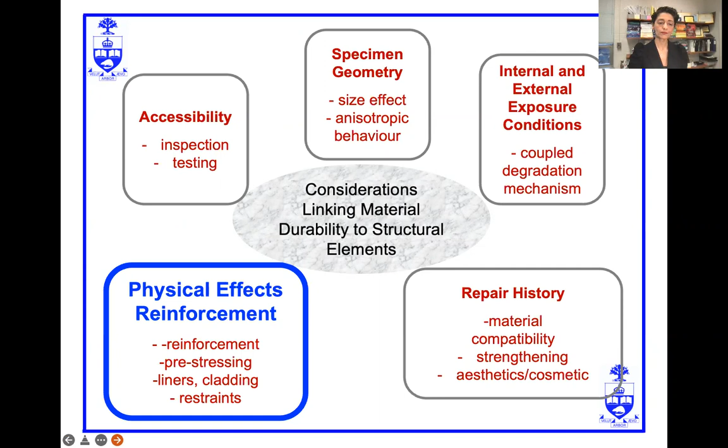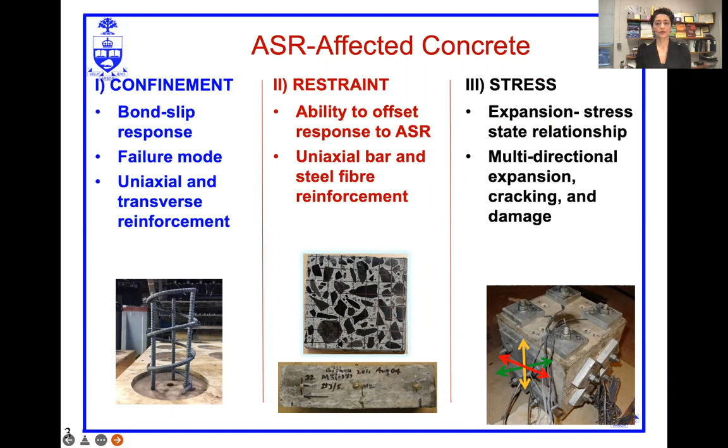I will specifically be speaking about the effects of reinforcement on ASR-affected structures, particularly the effect of reinforcement on the ability to confine, restrain, and stress the response of concrete to ASR. This work has formed the basis of student dissertations and manuscripts, and throughout the presentation, when I present the references on the upcoming slides, it is the students' names who are presented in bold.

Some initial experimental parameters that are set, which apply for the various studies that I will be presenting in today's talk, is that the reactive aggregate is a coarse aggregate Spratt, which is a siliceous limestone. All of the specimens were cured in an accelerated ASR chamber at a 50 degrees Celsius temperature and a greater than 98% relative humidity.

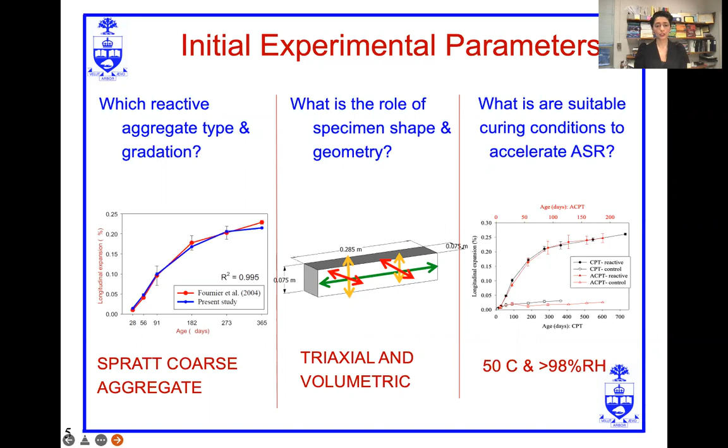We were also cognizant of the sensitivity of the specimen shape and geometry to the anisotropic behavior of the measurements. So wherever and whenever possible, we tried to take triaxial measurements, including assessing the volumetric expansion.

This slide shows a typical concrete mix design that we used in our study: high alkali GU cement, again, reactive coarse aggregate, non-reactive sand, and the concrete was boosted with alkali pellets.

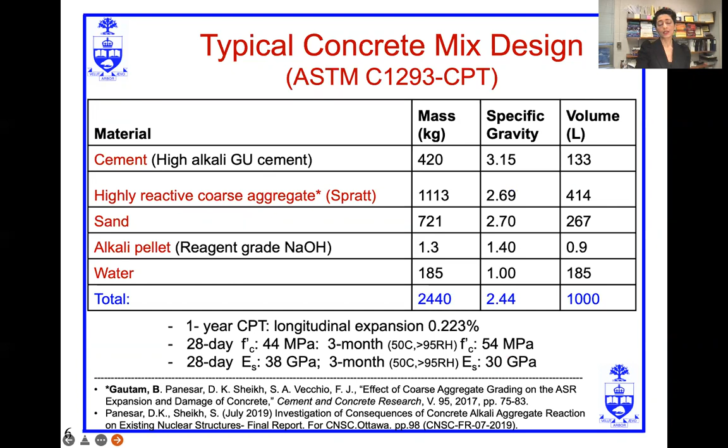To evaluate the confinement aspect, we conducted the pull-out test on about 72 different specimens using an MTS universal testing machine operated in displacement control mode.

The bar displacement relative to the surface layer of concrete was measured using 3 LVDTs, as you can see here in the schematic, and the slip was measured up to 12 to 14 millimeters, at which point the instrumentation was removed and the bar was completely pulled out.

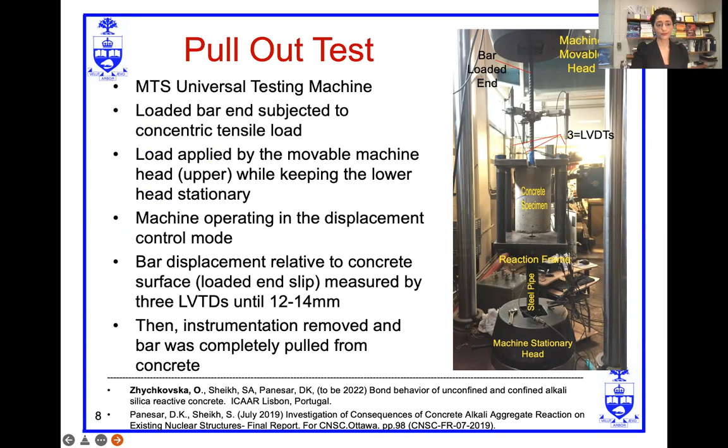Other than the concrete variable of reactive and non-reactive aggregate, we did pull-out tests at 3 different ages: 23 days, 4.5 months, and 7 months, to try to see the relationship between the progression of ASR and the pull-out test results.

We also had 4 reinforcement configurations: no reinforcement, transverse only, so a number 3 spiral with 100 millimeter pitch, longitudinal reinforcement only with 3 10M bars located 120 degrees from each other, and the LNTR case, which is simply the superimposed effect of the longitudinal reinforcement plus the transverse reinforcement.

The bonded length for all of the specimens was 100 millimeters, and the pull-out bar itself was a 20M steel bar.

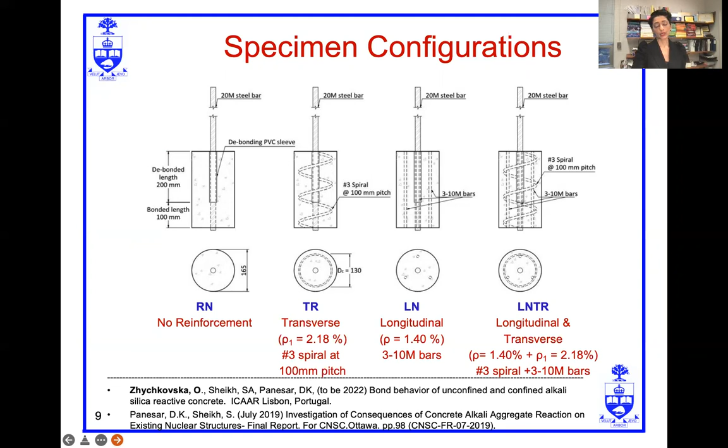This figure shows the bond slip response at 7 months for the 4 various reinforcement scenarios. So just to highlight a couple of the main points, first let's look at the plain concrete, the non-reinforced concrete. The black lines are regular concrete, the red lines are ASR concrete. What we can see here is that there is a reduced bond strength of ASR concrete in comparison with the control concrete, and that's reflected by those 2 blue arrows.

In contrast, if we compare that to the most heavily reinforced samples that we examine, the TRLN case, we see that the ASR response of the stress slip relationship is quite different. The bond stress actually plateaus for a longer distance, up to a slip of about 4 millimeters, due to the triaxially reinforced specimen and the added confinement response.

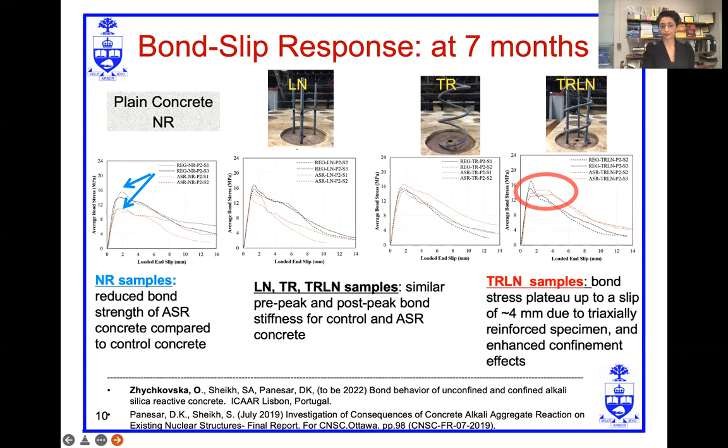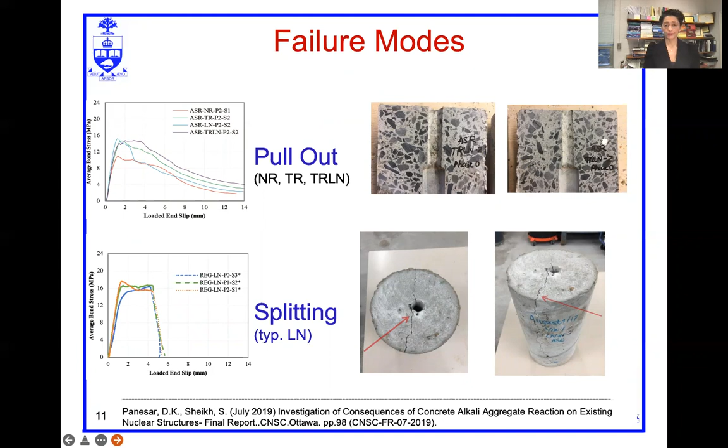In terms of the failure modes that were observed, most of the specimens observed a fairly classical pull-out failure. The only ones that didn't were the longitudinally reinforced specimens. Here we can see in the stress slip curves there is a sudden loss of load carrying capacity at about 5 millimeters load end slip. This corresponds to the visual observation of cracks extending from the steel concrete interface to the outer surface, and these cracks are visually apparent through the entire length of the specimen as well.

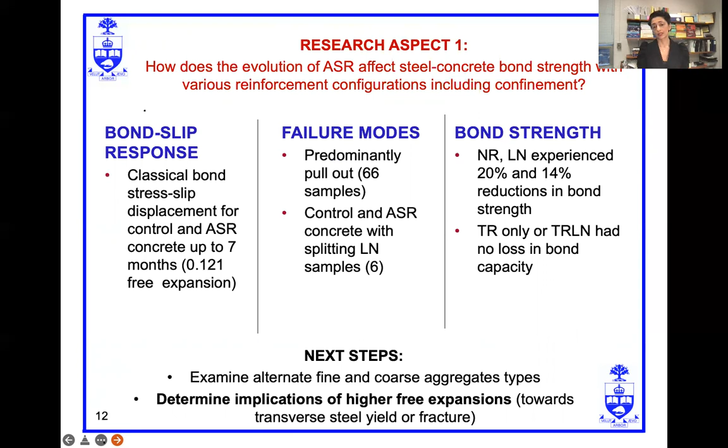Although it was observed that specimens with transverse reinforcement alone or in combination with longitudinal reinforcement had some benefits with respect to bond capacity, and that most of the specimens had a pull-out failure mode, we should note that these experiments were only done up to 7 months. More severe ASR expansions would have to be studied to get a better, more comprehensive understanding of the evolution of ASR on the steel bond strength.

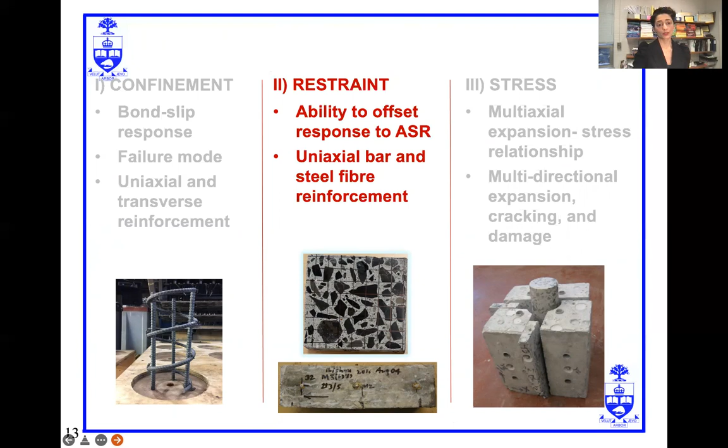Moving to the effect of reinforcement on the ability to offset response to ASR, we again looked at uniaxial reinforcement by use of steel fibers and longitudinal reinforcing bars. We had 5 different reinforcing scenarios in this case, using the Dramix RC80/30 steel fiber with 3 different volume fractions: 0%, 0.65%, and 1.3%.

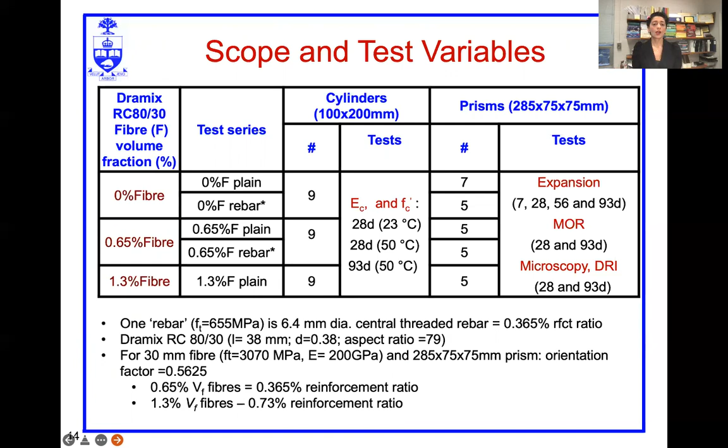Some of these fiber reinforced concrete mixes, the prisms, also had a central reinforcing bar, a 6.4 millimeter diameter bar, which corresponds to a 0.365% reinforcement ratio. So some of them had the bar and some didn't.

What we measured was 4 different expansion measurements: 2 longitudinal measurements of the core and the surface of the prism, and 2 transverse expansion measurements, one perpendicular to the direction of casting and the other parallel to the direction of casting. The transverse expansion is represented as the average of the perpendicular and parallel to casting measurements.

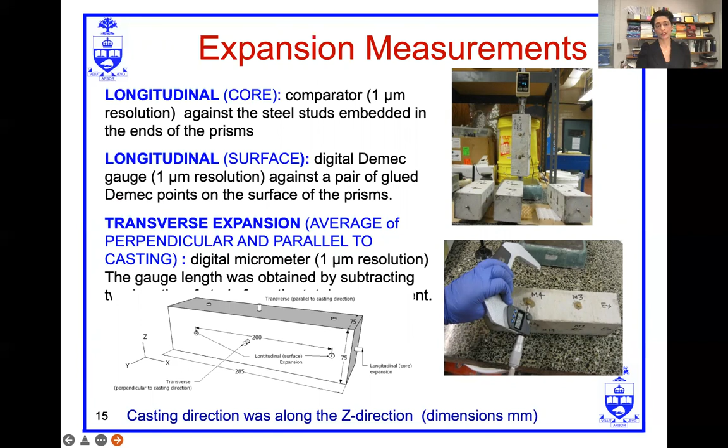What we see is the expansion is very sensitive to the presence of rebar as well as the positioning of the measurement. In the specimens without the reinforcing steel central bar, irrespective of the percentage of fibers, the core had a greater expansion than the surface, up to 25%.

In contrast, the specimens that did have this central longitudinal reinforcing bar, again irrespective of whether or not there were steel fibers, the core had a reduced expansion compared to the surface by up to 25% also. So interestingly, the expansion gradient from the core to the surface becomes reversed depending on whether rebar is present in the specimen or not.

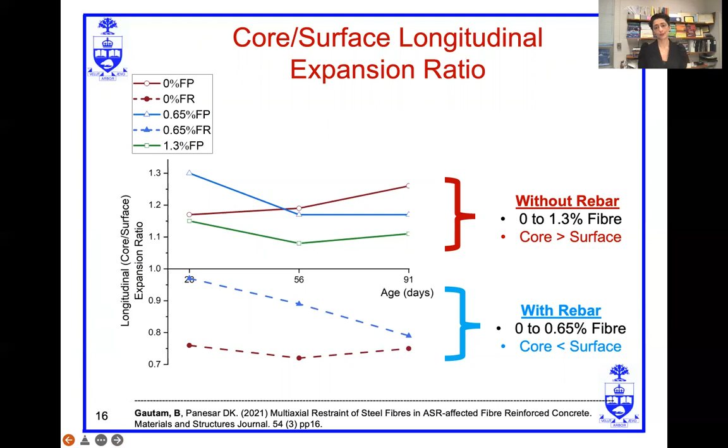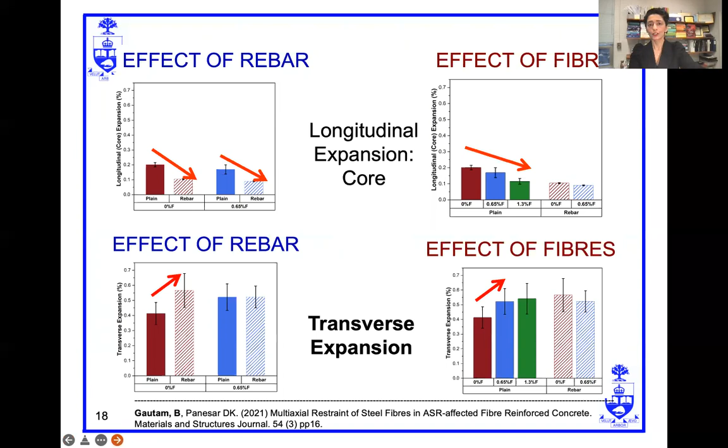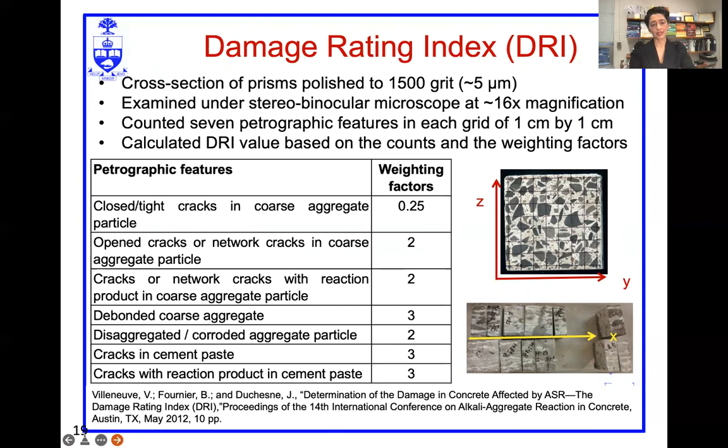So to take a closer look at that transverse plane, we conducted the damage rating index on the YZ surface where we evaluated 7 petrographic features. I'm not going to get into too much detail about the index itself, but I will highlight some of the features observed, which show the potential roles that the fibers were playing.

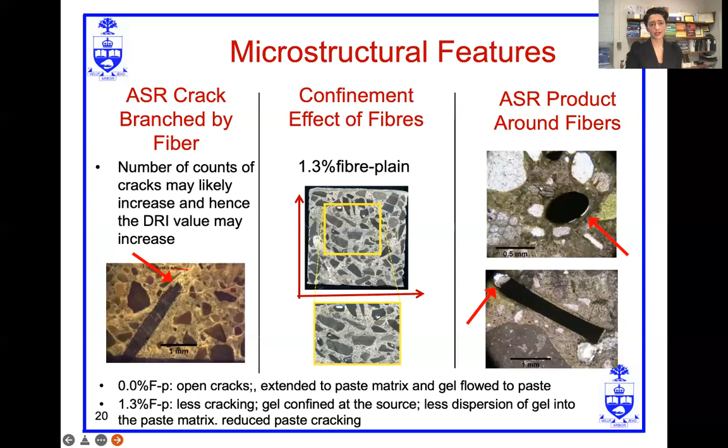We see that the crack is branched by a fiber. We also observed that fibers did provide some confining effect, so there was less paste cracking compared to the 0% fiber case, as well as less dispersion of gel into the paste matrix. We also observed the accumulation of ASR product around the fibers. Looking closer at that interfacial zone and the bond between the fibers and the matrix would also be a necessary next step to understand the mechanism.

So although we did find some benefits with the fibers, in terms of reducing paste cracking, partially or completely offsetting loss of mechanical properties such as elastic modulus and modulus of rupture, part of the complexity in understanding the real role of the fibers and the reinforcement was affected by the anisotropic behavior due to the geometry.

Specifically, fibers and the reinforcing steel seem to reduce the longitudinal expansion, but there was a transfer mechanism into the transverse direction, not necessarily reducing it.

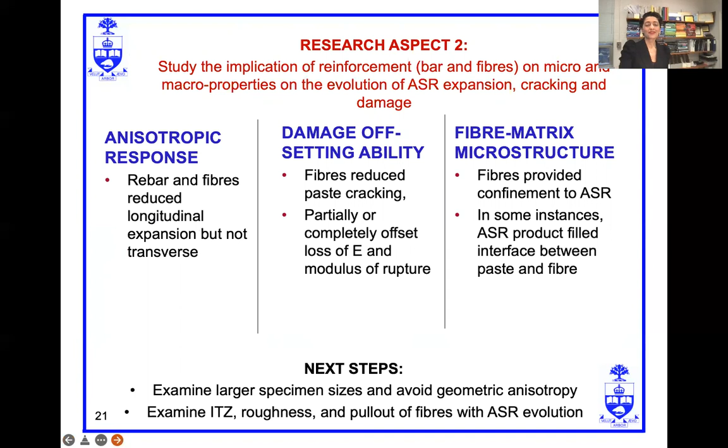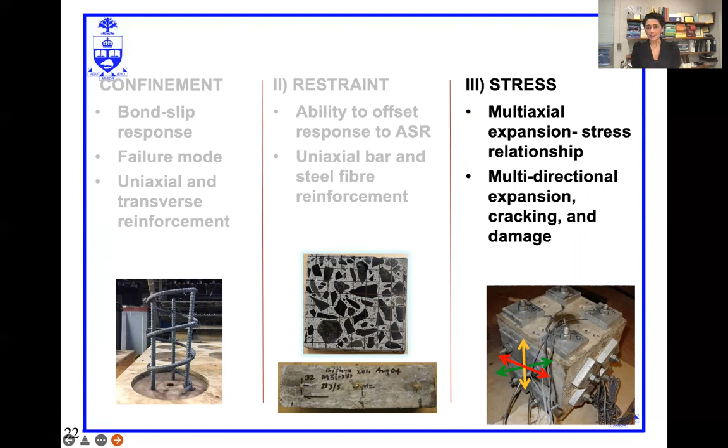So in our next study, to try to eliminate the effect of the geometry complications, we looked at cube specimens, specifically to look at expansion stress relationships.

We developed a method to apply and sustain multiaxial compressive stresses within the concrete, and this approach was conducted using a post-tensioning method of pre-stressing high-strength bolts.

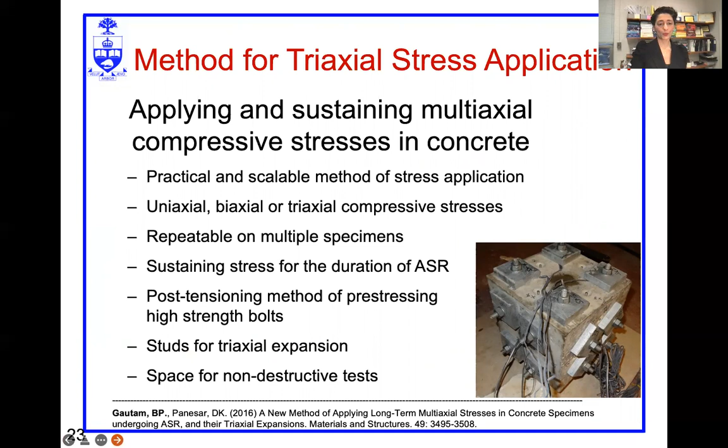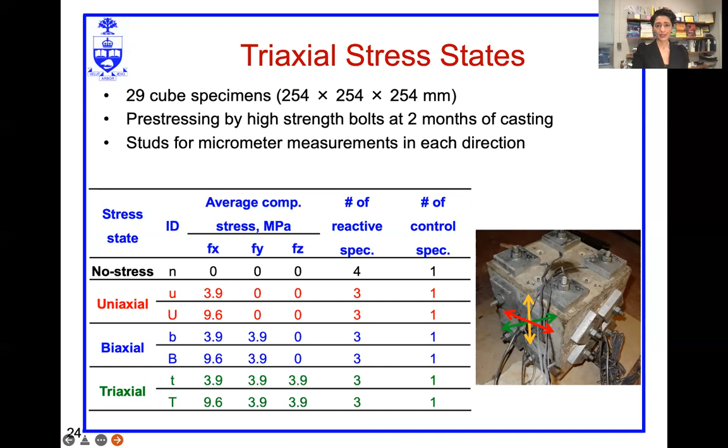We considered 7 different stress states, shown here on the slide: a non-stress case, 2 scenarios of uniaxial loading, 2 scenarios of biaxial, and 2 scenarios of triaxial loading. Our 29 cube specimens were 254 millimeters in dimension, and this figure shows some of the results.

The vertical axis is expansion. The horizontal axis shows the first set of data, the non-stress case, in the X, Y, and Z directions. Here we see, as we would expect, very similar expansion measurements.

For the 2 biaxial cases, low load and high load, we see that in the loaded directions, X and Y, there is some suppression of the measurement - that's the red and blue bars. But then we see in the free direction, the yellow bar, there is a transfer of that expansion.

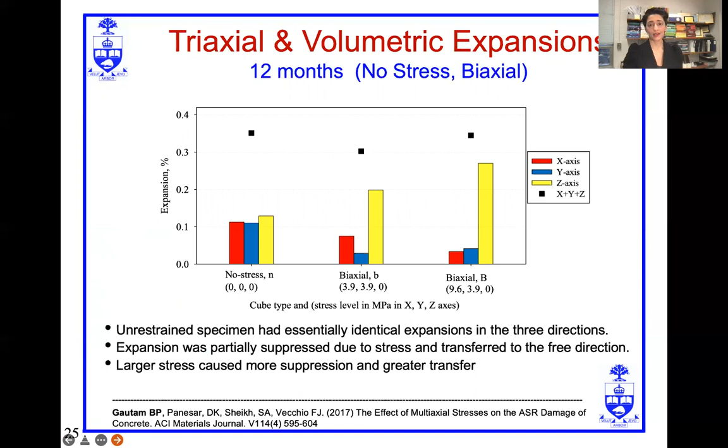Also shown here is the volumetric expansion, these 3 black dots. So irrespective of the large difference between the stressed axes and the unstressed axes, the volumetric expansion seems to conserve itself.

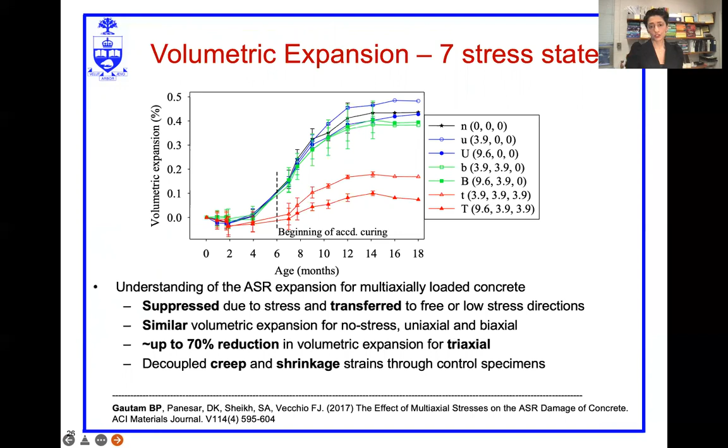Further to that, this shows the volumetric expansion for all of the stress states, and we can see that all, with the exception of the triaxial case, had a very narrow band of ultimate volumetric expansions. It was the triaxial loaded scenarios that had a marked reduction, up to about 70% reduction in volumetric expansion.

The ability for other approaches to be sensitive to this phenomenon of suppression and transfer - we did the damage rating index on 3 different planes for each of the stress states.

This analysis also captured and was sensitive to higher damage for free directions, lower damage for the stress axes, and in general, for the triaxial case, similar damage rating index for each of the 3 planes.

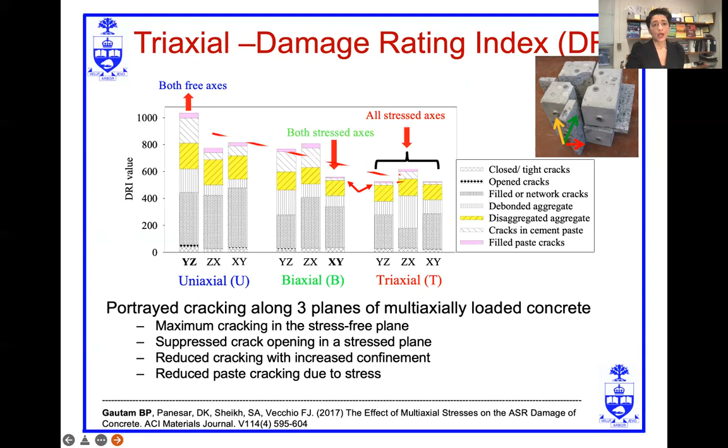Anisotropic behavior was also confirmed by coring these cubes, and we can see that for the biaxial case, in the free direction, there was a loss in modulus of elasticity compared to the stressed direction.

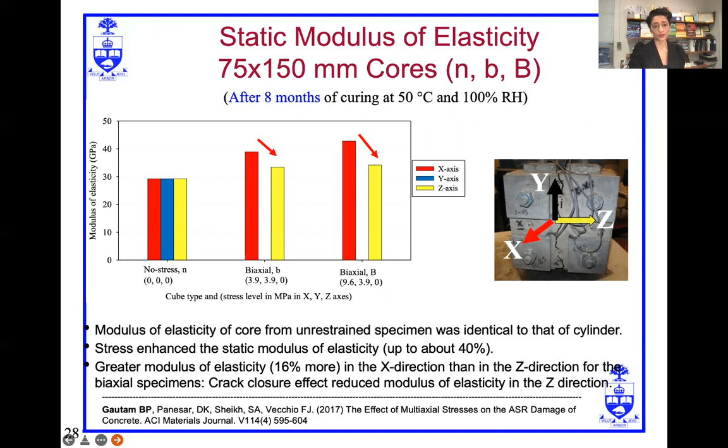I'm not going to get into too much detail about the conclusions here. I will, however, summarize the various concepts and aspects that we have studied.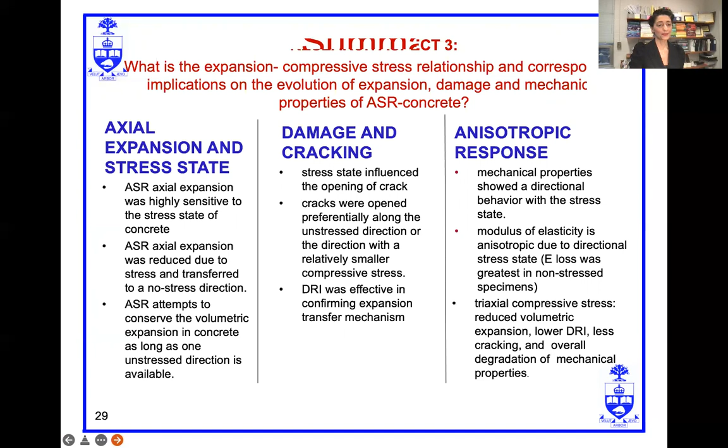Related to bond strength, reinforcement and restraint, and multiaxial compressive stress, we continue to investigate these aspects with different scenarios and different aggregates.

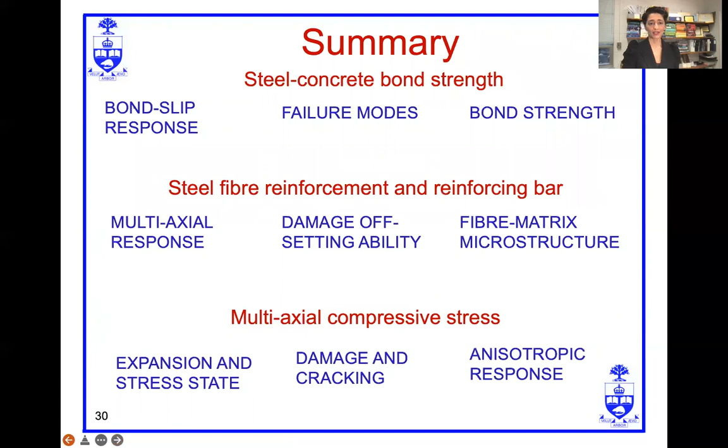We believe there is a need for this in order to link better concrete material degradation mechanisms to actual field performance, particularly because the impact of the outcomes is quite important, both from a modeling perspective and from a field perspective. For modeling, advancing numerical and analytical models to capture multiaxial expansion stress relationships is necessary to refine estimates or predictions related to long-term performance of ASR affected structures.

And from a field perspective, designing destructive and non-destructive testing and proper interpretation of the role and proximity and direction of the reinforcement relative to coring and sample retrieving is critical in order to make appropriate assessments of condition assessment data.